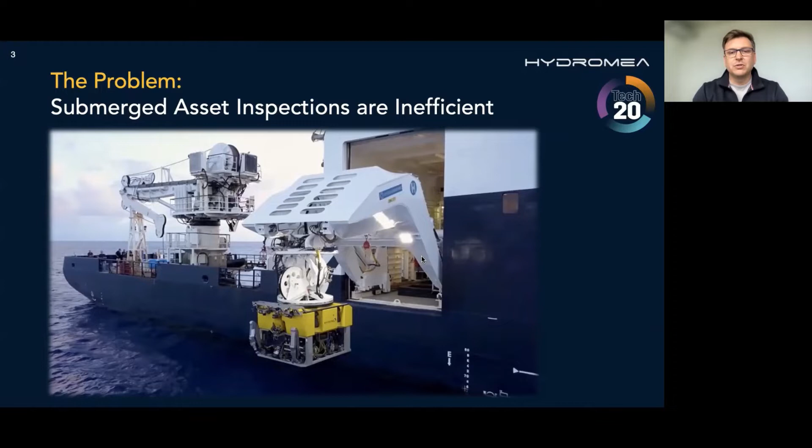So the problem that you may be aware of that the offshore industry has, and the one that we are trying to solve, is that submerged asset inspections today are highly inefficient. This is one of the images of what actually needs to be done to carry out IMR - inspection, maintenance, and repair - in the offshore space. Today, inspection, maintenance, and repair is roughly similarly divided in terms of what's I, what's M, and what's R.

So roughly 60% is inspection and maintenance. The industry is trying to take the supply ships off the water and replace the ROVs with AUVs or UIDs. Here are some examples of this technology that is being worked on and increasingly being trialed in the North Sea specifically, whether it's Saipem, Saab, Oceaneering, or Eelume, and there are some others as well that are trying to address this problem.

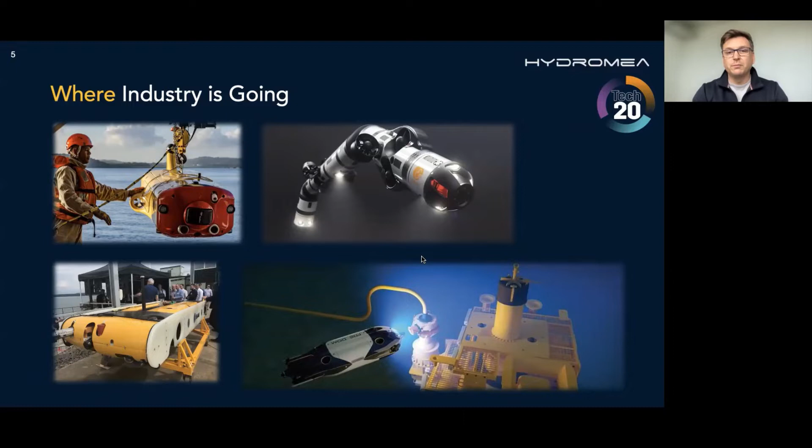What we see is that oil and gas has been giving jobs to service companies for IRM up until now, and will certainly continue to do so. But over the next decade, offshore wind will be putting significantly more assets in the water than oil and gas has put for the whole lifetime of that industry. That's also what Carl Troll said in one of his presentations.

So the question really is, when we look at oil and gas, but increasingly when we look at offshore wind, how much I and M needs to be done, and how much R will continue to be done? We know that the assets of offshore wind are less sensitive, let's say.

There is an opinion that I and M, especially as we go into predictive maintenance, will actually help reduce the share of R, repair, that needs to be done, as long as the asset owner has a better picture of the condition of the assets underwater.

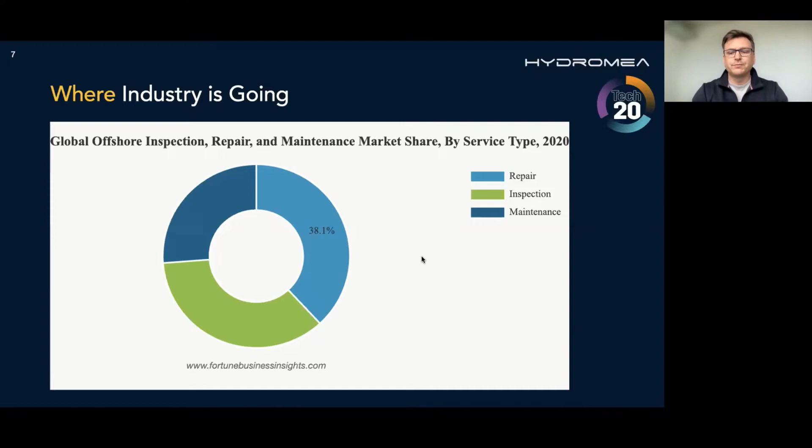Another question: is it really necessary to put multi-million-dollar vehicles to do the I and the M? Can this be done with less expensive, more affordable systems? What's going on right now, as you may certainly be witness to, is the industry is developing technologies in smaller and smaller form factors. So today it's still difficult to imagine putting all this great tech on a small vehicle - you do need a larger system just to support the weight and size of many subsea technologies.

But we also see that more and more companies - sensor companies, visual inspection companies - are coming up with technologies that are significantly lighter, smaller, and can do the same job pretty well.

So we, Hydromea, take inspiration from nature, and we kind of say, all right, it's true that the big vehicles will have a place in this ecosystem, and they are needed because there are jobs that can only be done by massive AUVs. But there are also opportunities to come in with smaller form factor robotics. So if there are orcas out there, there is also fish that can manage to navigate high currents and depths and so forth. And that's what we're really trying to go to with our technology.

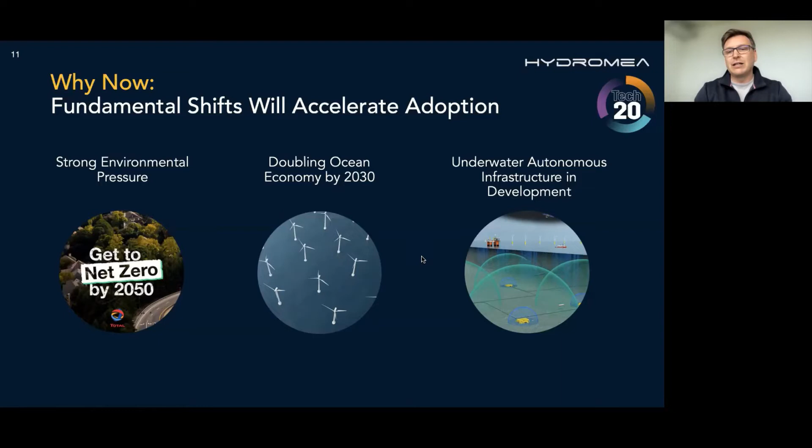There are fundamental shifts that accelerate adoption of robotics underwater today. Certainly strong environmental pressure to look at CO2 reductions. Offshore wind is projected to explode, and the ocean economy overall is also projected to double between 2020 and 2030. There is also more and more going on now, not just talk but also activities in underwater autonomous infrastructure development, notably led by Equinor in the North Sea.

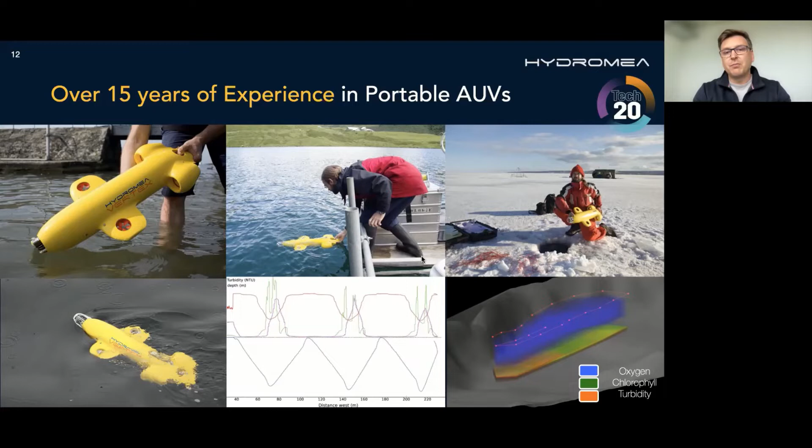Hydromea started as a company making portable AUVs to collect environmental data in the water column. We thought that if you send a small swarm of relatively affordable submarines in a delta, a lake, or a particular perimeter of a sea, this swarm can collect thousands more data points than two people could on a boat - that's how it's done today. The resulting output of this activity would be a 3D cloud of whatever it is that you're measuring. So we've built a number of those vehicles and run some scientific campaigns to collect data.

And then we went to Aberdeen and spent time with the Oil and Gas Technology Center, which is today obviously NZTC, Net Zero Technology Center. We learned about the challenges that the offshore industry faces, and we were quite inspired by that.

We have a pretty good fit for the problems that the industry has, and we started to connect more and more to the offshore energy industry. So what came out of it is that we believed we can offer a combination of the freedom of an AUV, but control and size of an ROV.

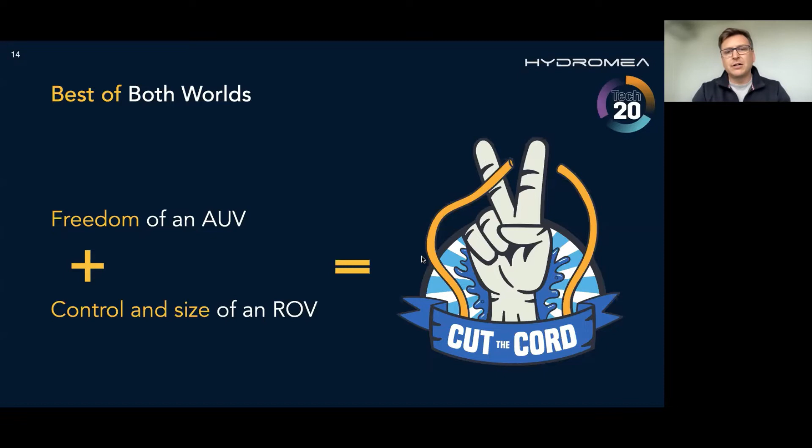So a hybrid system that would be able to travel autonomously to a point, but then could also be taken over by a pilot remotely to do an inspection, a certain mission, maybe data harvesting from sensors. The vision of Hydromea, which comes from many conversations with operators of offshore energy assets, is that in the future you will have more and more metal on the seafloor requiring monitoring and inspection, and this will increasingly be done by robotics.

Big vehicles like Oceaneering and Saab are developing this, but also small drones. We also take inspiration from what's going on at the ground level. We see the emergence of aerial drones - they're ubiquitous today, kids play with them. But there are certain challenges underwater that many of you are aware of when it comes to communication, navigation, visibility, pressure, currents. There hasn't been that much done in the portable robotics space yet, but certainly it's a direction that a number of companies are taking.

So at Hydromea, we've discussed a roadmap - how can we actually bring this technology to the subsea space? It is a complex technology, it takes time to de-risk certain elements of it for a very harsh environment such as subsea. With Net Zero Technology Center, we've brainstormed and laid out a map that we believe we can deliver on, broken into 4 steps.

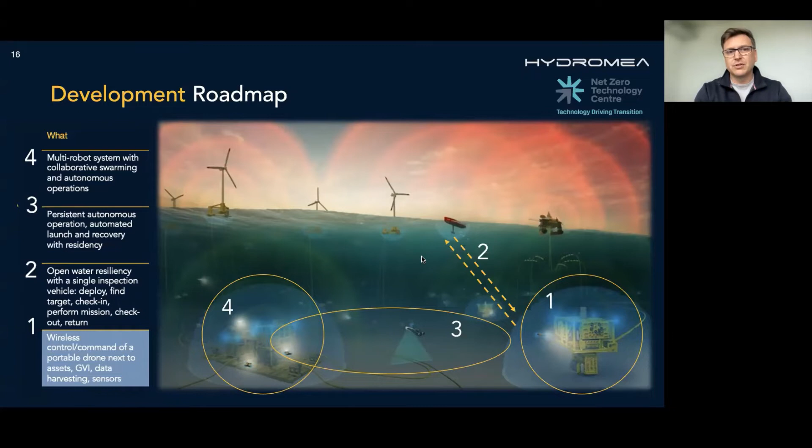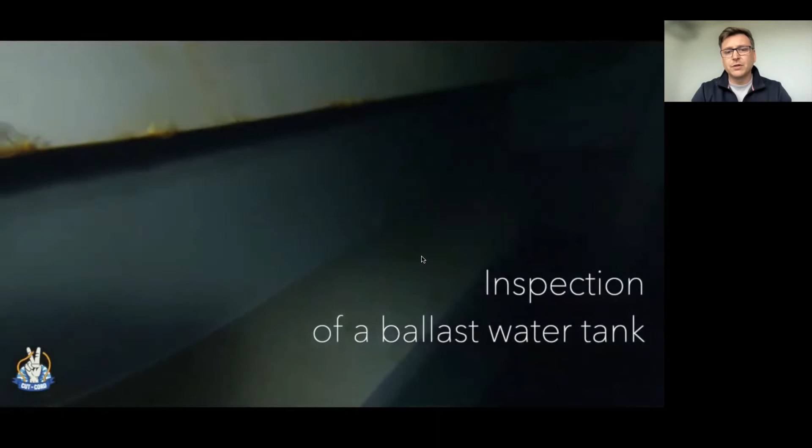There is some music as well you can hear, but I'm sharing with you a video that we just compiled relatively recently. We did a pilot with Total Energies in September as part of this project, as part of the first phase of the roadmap.

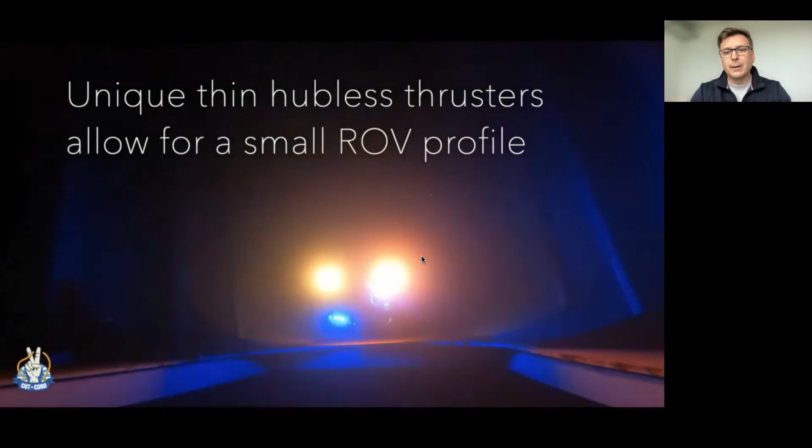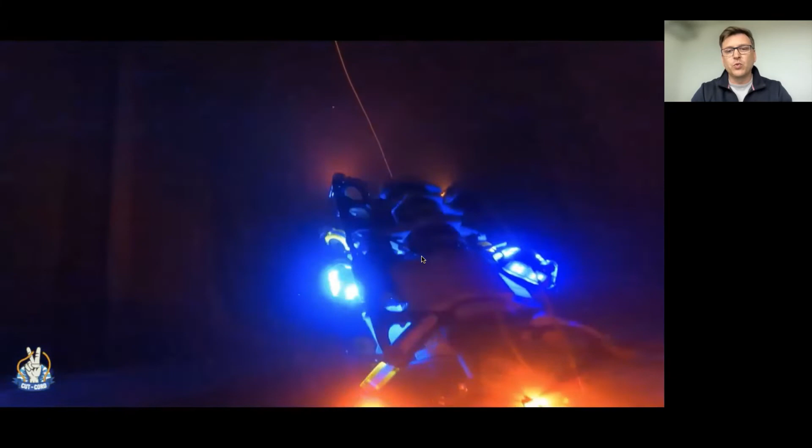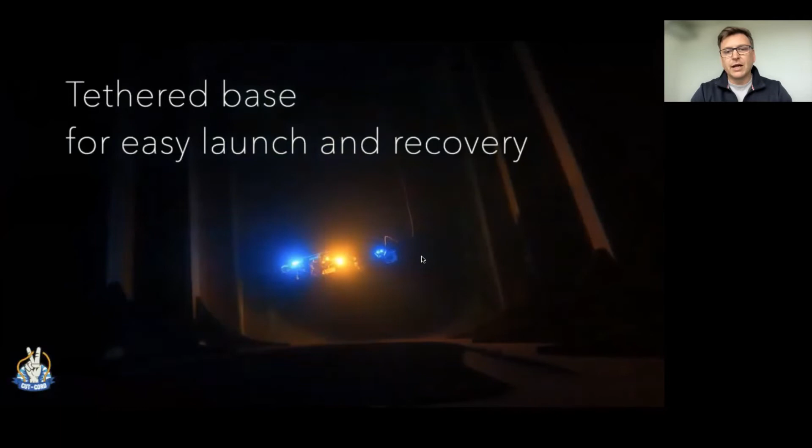We're showing an ROV that consists of 2 vehicles. One vehicle is tethered, let's say your traditional ROV, but then you have another vehicle that we call daughter, that can be launched into its own wireless campaign. The second vehicle that is wireless - you can see there now the daughter is unleashing from the mother. Then the daughter has full control of a pilot on the topside.

We use a technology we call Luma. This is a free space optic technology that is particularly suited for this type of task. It's low latency, high speed, high bandwidth communication that provides a pilot with exactly the same experience from a wireless drone as if he or she would have from a tethered drone. So you have a tethered base in a tank like this that is communicating to the wireless drone, and the pilot takes over the wireless drone and does the inspection as they need to.

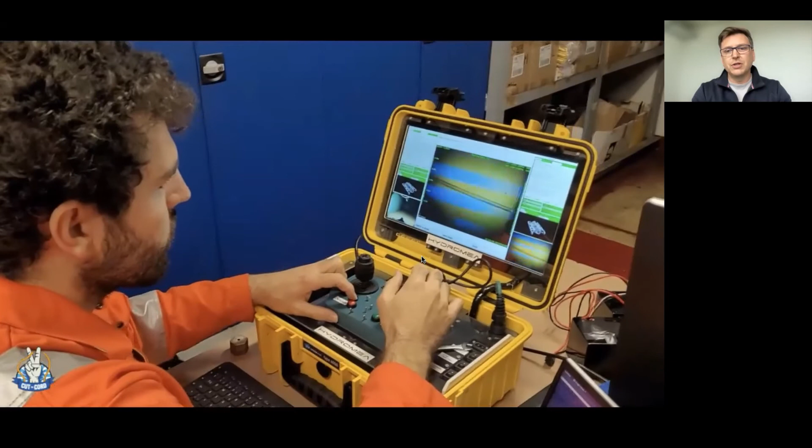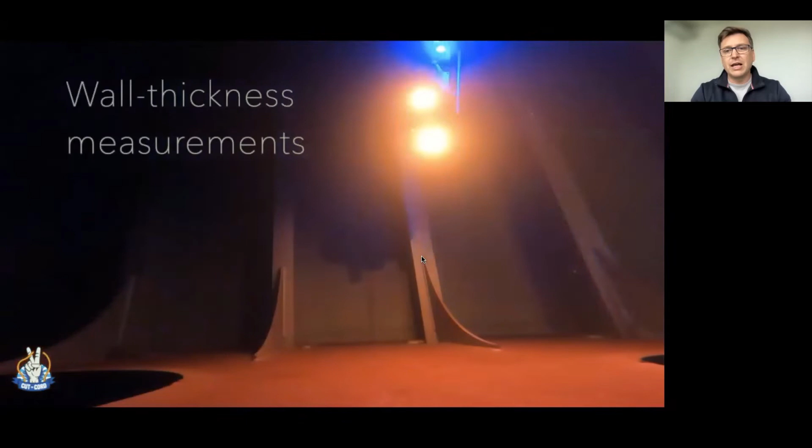That certainly helps in those spaces where you have a lot of furniture, complex spaces where the risk of tether entanglement is relatively high. You could use this wireless drone to get into specific, very difficult areas. It's not constrained by tether, and it's got 6 degrees of freedom. It could turn any way.

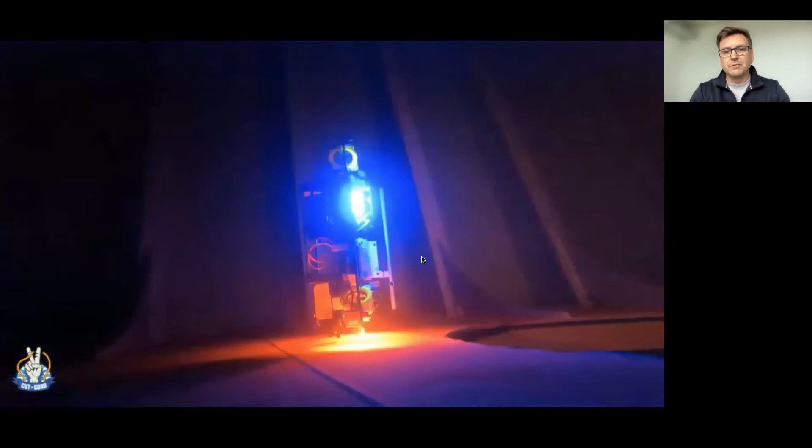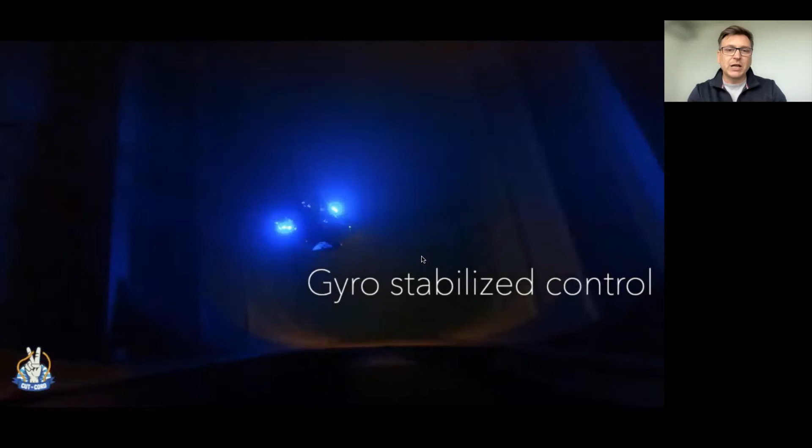So for instance, here, the wireless drone takes a UT measurement, the wall thickness measurement, completely vertically. This goes a step further from what ROV technology today allows you to do in confined spaces. But again, the idea here is not just to develop a new vehicle for confined space inspections, which is one outcome of this step.

The idea here is really to show that you could have a wireless vehicle coming next to an asset underwater and being taken over completely by a pilot sitting safely on shore, who would then command and control this vehicle, get real-time video, get real-time data, offload, and could either control the vehicle to do a certain inspection, or ask the vehicle to load up a mission to do a small autonomous inspection of the surroundings, then come back and report back to show the quality of the collected data.

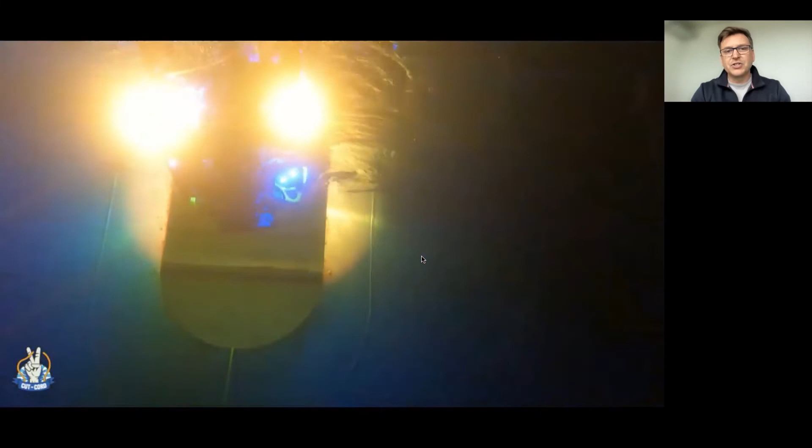So this video is just about to finish, and there are a couple more slides that I will show you that basically cover some of the technology that allows this.

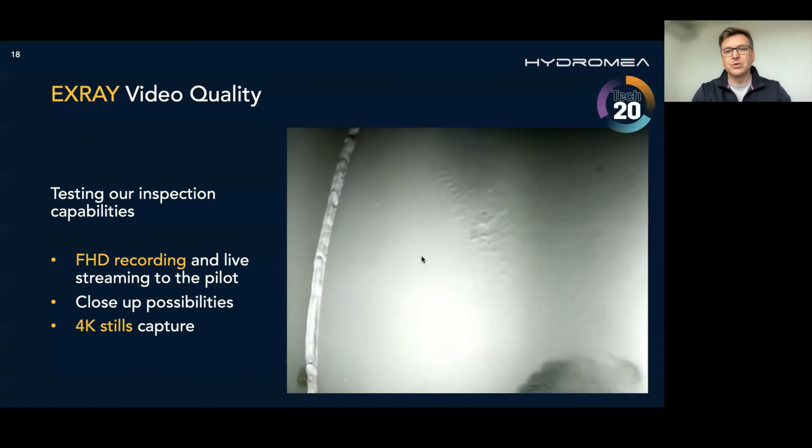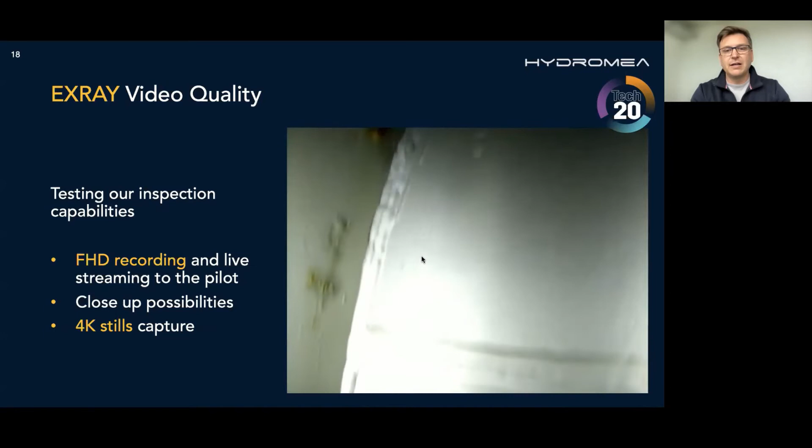So this slide just shows you the quality of the video. Of course, today video cameras have pretty good quality. This is HD video that you see, but it's also possible to take 4K shots if you need high quality images collected during the inspection regime.

We also already have 8 cameras: 4 front-facing cameras for quadroscopy, and 4 sideways cameras for peripheral vision. That allows us to collect data as we do deployments already today, to enable sense of distance from a particular asset, provide global situational awareness, work as obstacle avoidance, and help with positioning and station keeping.

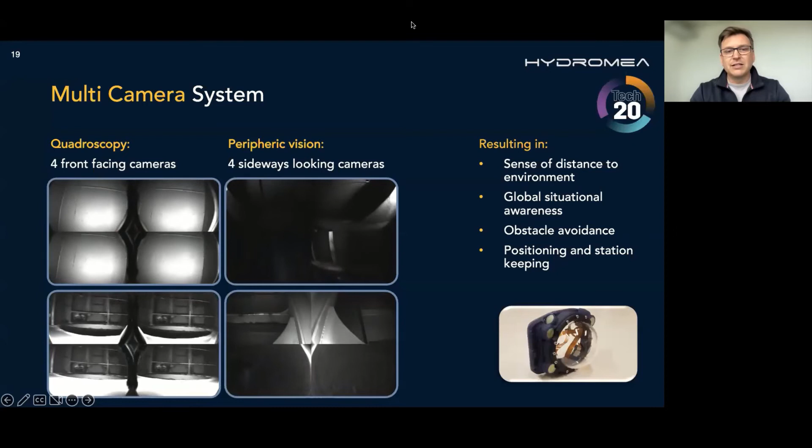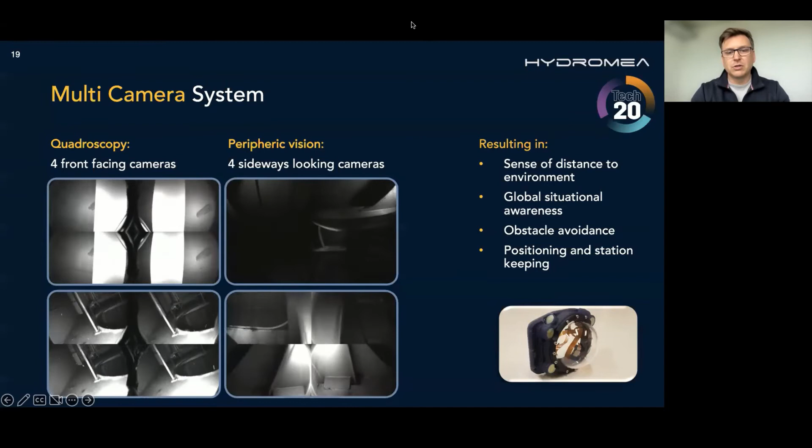And of course, yes, it is developed for relatively clean water environments. Visual will only work as long as there is visibility in the water. The next step we are working on is adding sonar to the system so that it can also in the future work in the relatively turbid waters of the North Sea. So it's not just the visual that we'll be relying on, it's of course also sonar data.

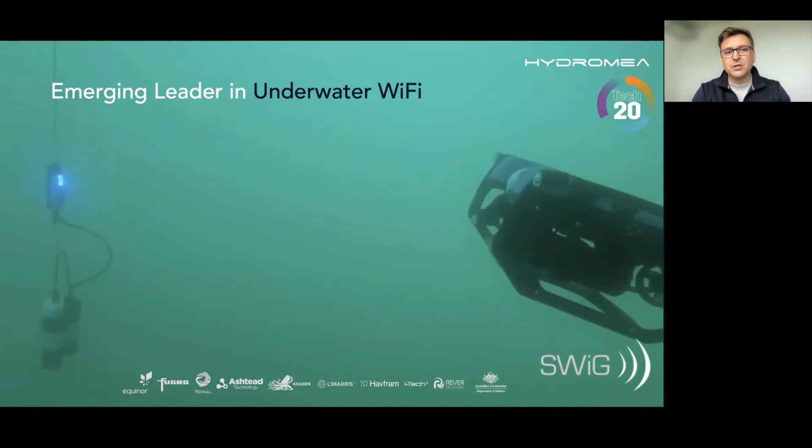Part of the system that enables this is, as I mentioned before, free space optics. Hydromea has been developing optical communication technology to connect point A to point B wirelessly underwater for a number of years. In fact, we now have a line of products that you can just send us an order for, and you can get it within a 10-week time.

One of the key applications and use cases for this technology, courtesy of Equinor and their vision, is that you have acoustic communication around your infrastructure, shown here by green bubbles. But optical communication gives you this Wi-Fi capability to connect to your control room with a high bandwidth link, represented here with blue bubbles around templates. So you can imagine that if you install FSO, free space optics modems, like a Wi-Fi router at home, you would be able to have high-speed communication within that limited range around the asset.

It's very similar to your Wi-Fi at home. As long as you are in your office or at home, you can stream Netflix, you can have video calls, but the moment you step out of your house, you will lose that connection. It's the same logic here.

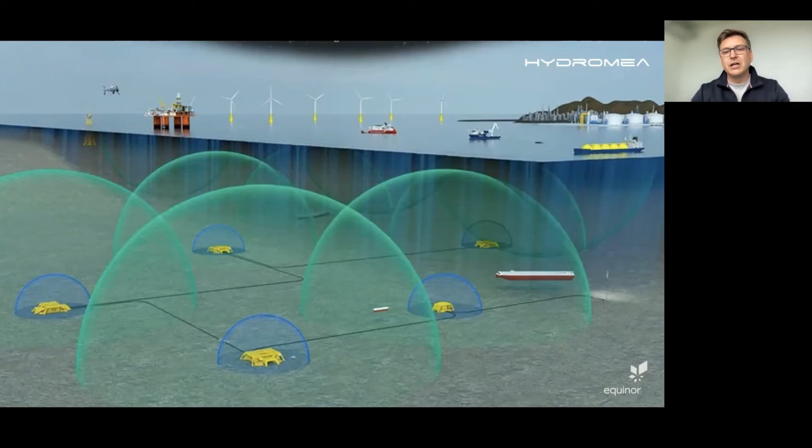I won't spend much time talking about optics versus acoustics, but there are two key points. Acoustics is really good technology for range, and it works really well, having been deployed forever now. The big advantage of optical communication is that it's significantly faster, and because it's faster, it can send much more data in a very small period of time, so the energy efficiency, per byte or per bit, is quite high.